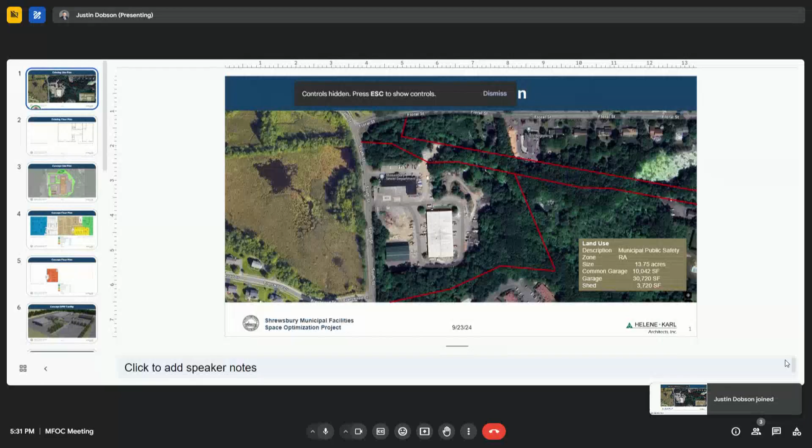Over the last, since the last meeting, there's been some dialogues about the budget and other program issues and everything that I've now reflected in the current plan. Vertex will be discussing in more detail all of the budget items. Thank you, Marc. Thank you.

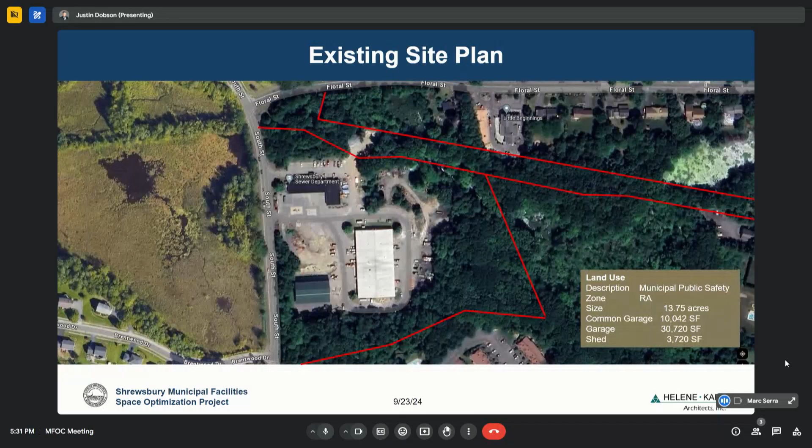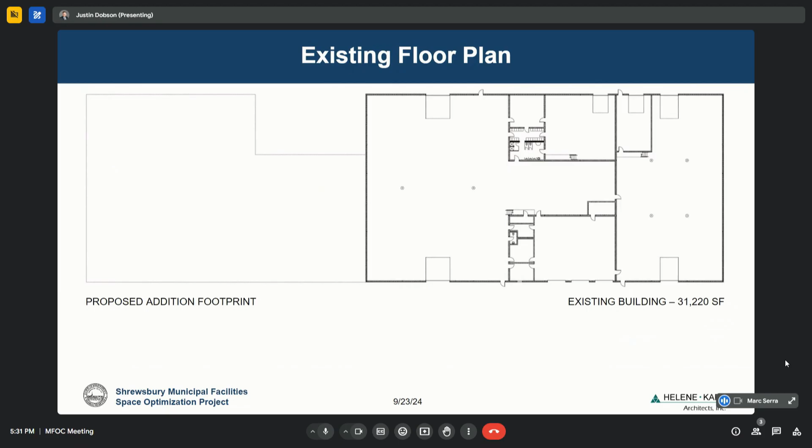A lot of these slides should look familiar. Obviously, the existing site plan, I don't need to go into that much. You're familiar with that. Next slide. Again, this is just the existing building. What you will see is a slightly different footprint, and I'll get into that in a little more detail. Next slide, please. This is the new site plan.

Based on the dialogues that we've had since the last meeting, we talked about budget and there were some concerns, so there was some value engineering done to modify and try to lower the cost. One of the big moves was to move the office function that used to be out in this little green area onto the second floor, which had a significant impact in reducing the cost of the budget.

As far as the site plan goes, it's laid out the same as before. The recycling area, public parking, parking for water and sewer, and the parking around there. That really hasn't changed much. However, there was a development of this green space by taking the addition off and putting it over the second floor between the joint. That's one of the items we can talk about further as design goes on, if there's additional desire to reduce more paving on the project.

For example, there was a suggestion that maybe we can reduce some of this green area by simply pulling this parking up about 20 feet, depending on how you want to use this area. That could add some additional green space and limit some of the paving. But those are details we can get into further once we get into the design.

The other thing you'll see, because it's a line item below the budget, is there was a vehicle canopy in the back. I'll let Vertex talk about that a little more. There was some further discussion on the recycling and some more program development. So basically we simplified that area, and it's just the pave area now. It can take all the program that was previously in there, but there will be further discussions and developments on that. Next slide, please.

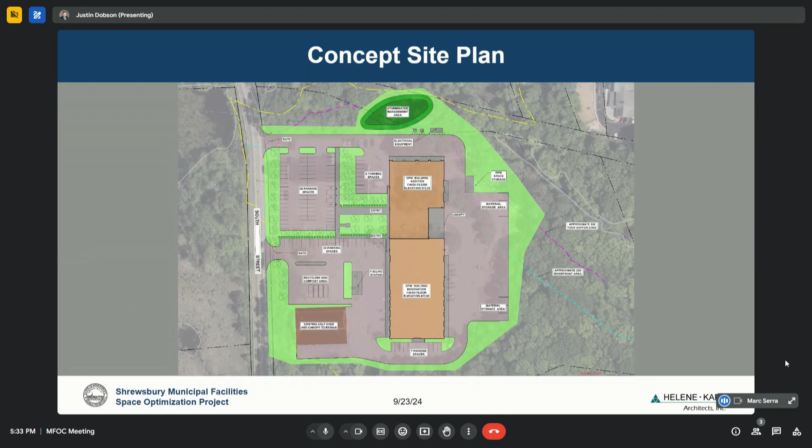The first floor plan is very similar in the blue areas, which is water and sewer. However, we took about 3,000 square feet out of that. If you remember before, the vehicle parking was very similar to the highway with a drive-through and trucks pulling to either side. In this case, to reduce some of the square footage, now that's tandem parking, which still allows flexibility to park some of the larger vehicles like the vac trucks. So that was a change to help reduce some of the cost on the overall project.

As far as this area goes, it's essentially the same, but there have been some slight changes. You may remember that the break rooms were in the back; they are now in the front, so they get better natural lighting. The restrooms and locker rooms are pretty much the same size. All the other program is essentially there except for the office function.

And we were able to introduce the bunk room, which has always been a desire, and so that would be in the back here that we can now accommodate. The trucks are still back in a covered canopy, along with the brine tanks.

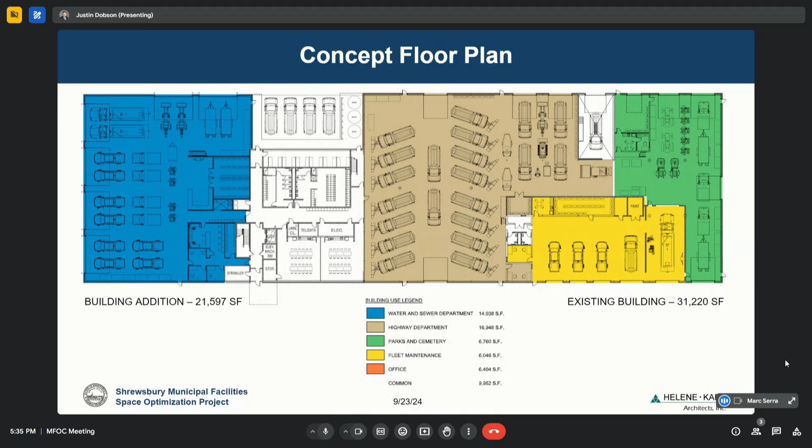This orange area is basically now the administrative area that used to be sitting in front. We've now put it on the second floor. Essentially, the biggest change is putting it on the second floor, and it's just the introduction of an elevator.

If you remember in the previous scheme, there were already two stairways there to accommodate a meeting room up there. So from a programmatic standpoint, it has not impacted anything - all the program is still in there. On the first floor, we did pick up a bunk room and probably better orientations of some of the rooms, like the break room on the first floor.

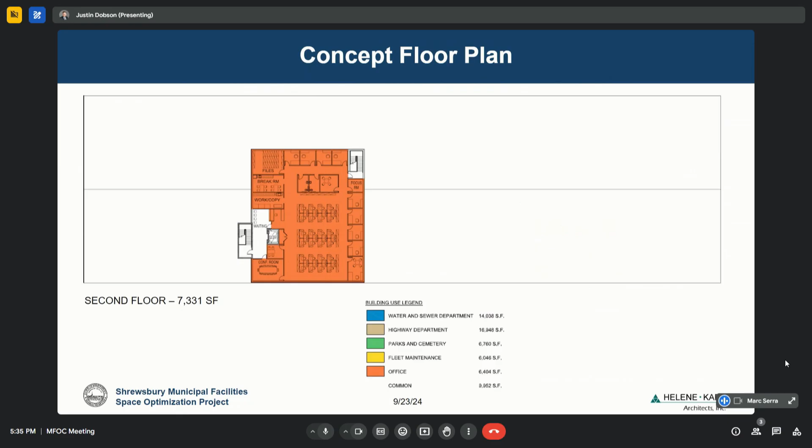So what this is going to be is I'm just going to run you very quickly through a series of images. If you would like me to stop and talk about particular areas, please do so.

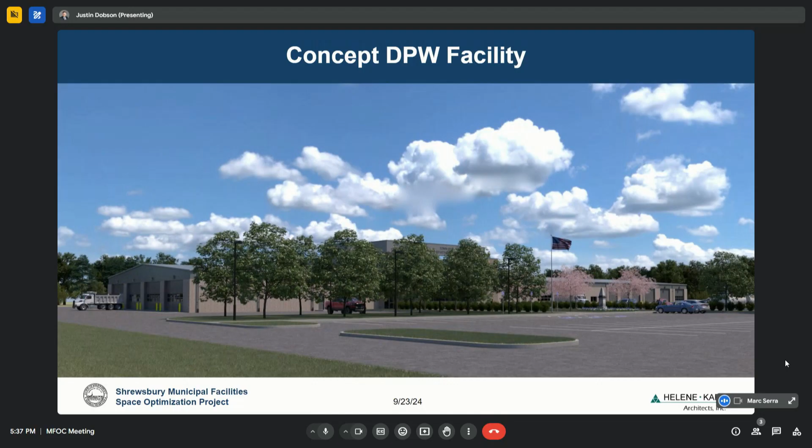This is approaching, and you see the little curb island there. That used to be the composting wall.

We're encouraging that some type of island go there while the recycling component is being further developed. That will make sure there's proper traffic guidance through that area, because if we just left it open, we feel strongly that there would be too many potential private vehicles and operational vehicles running all over. So this way, we want to make sure the path is clearly reinforced.

Again, this is just looking from the composting area. One of the other ideas that came up during the discussions was to delineate the public areas more from the operational areas, so you'll see there's an introduction of hedges there.

This can also be reinforced with like a chain link fence where the shrubs grow into it. So it's not a chain link fence per se, but it does create a nice barrier to segregate the public areas from the operational areas.

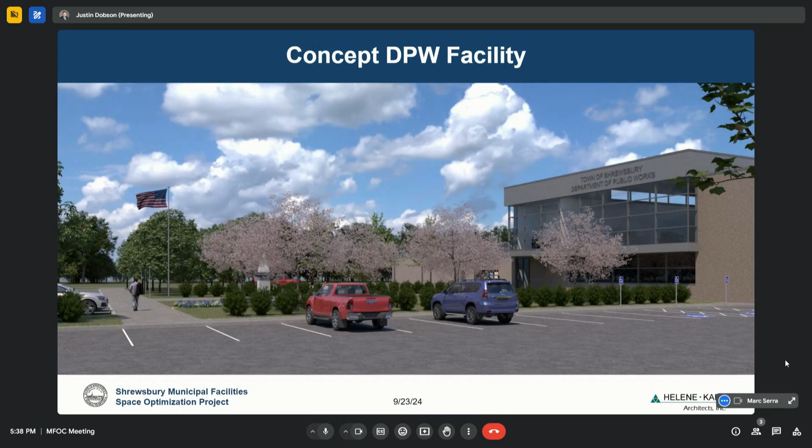This is a view from the fuel island. We have left an access road back here - I don't really want to call it an access, it's really more of a curb cut to get to the back of recycling.

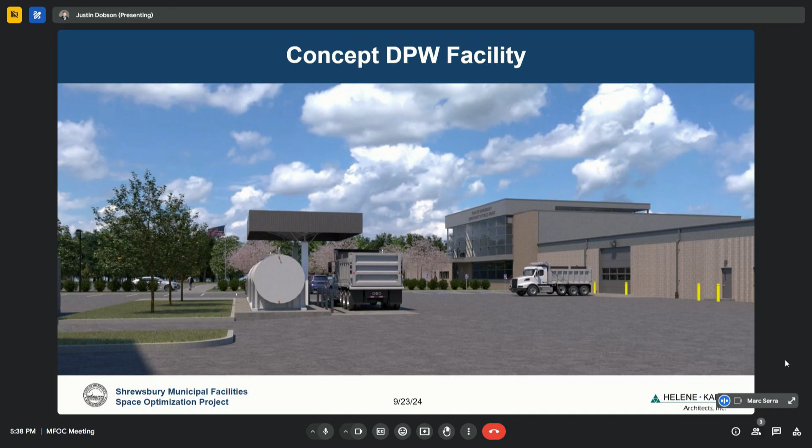We think this is an important feature because one of the discussions was talking to the highway manager and everything. He currently can sit out and look out his front window when he's in the office down there.

In this case, he would be able to come here, and if you stand at this area, he has full panoramic view of the operations for highway. And then if you go in the conference room on the other side, the same can be said for water and sewer. So if his office is up here, he simply needs to walk here and he can monitor whatever's happening in that area. And then I believe the last slide is just the finished slide showing somebody walking towards the building.

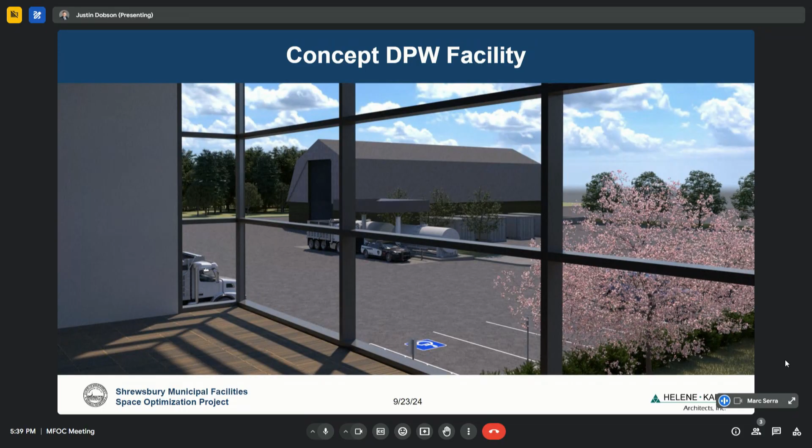Are there any questions?

I noticed you show the clerestory on three sides. Four sides? Well, you have the big windows in the front and then clerestory on the other three sides. But on one elevation, the north elevation, you don't show any window on the rendering, so you may want to look at that and make sure it's there.

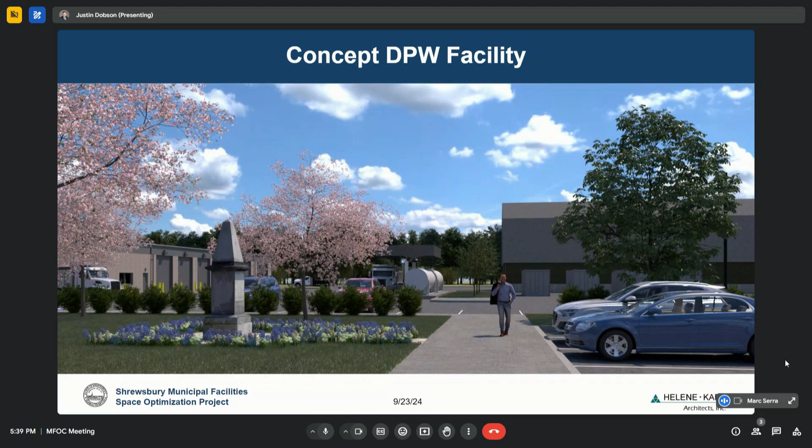The other thing too is trying to coordinate this with the heights of the roofs and stuff. Again, this is subject to change, modifications. We may be able to lower the roof a little and everything. We just want to make sure that, at least in this initial concept, the whole construction could go together, because the last thing you want is your building leaking or anything like that.

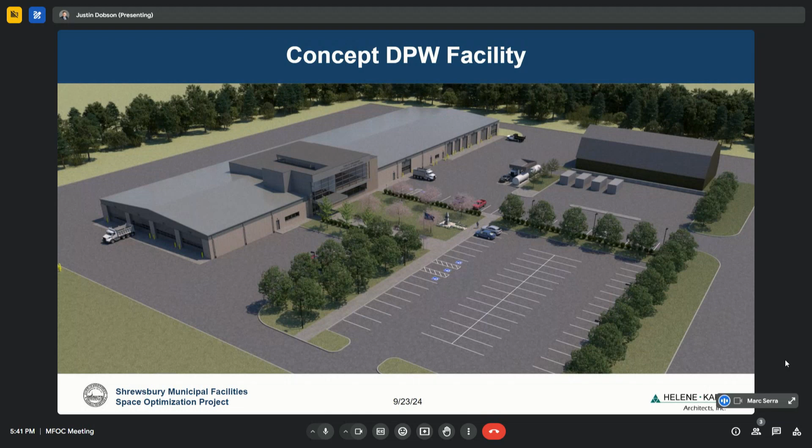Does that answer your question? Yeah, I think so, not sure. Again, we can explore this more, maybe not so much on this side, but on the other side where you do have the offices. Finalizing that final roof height and stuff, we may be able to get some additional clerestory windows in on the office. But as a concept now, we just want to have a placeholder. We feel confident with transoms above it on the interior side, full vision panels on doors, or side lights, that all the individuals in that office area will be getting adequate light and sharing, and it'll feel bright and airy in there.

The only other question is the median in the recycle area, is that just to break up the area? Okay, so the idea here is, as vehicles and cars are coming through here, if we took that median out, there's a potential that they could be driving all over. So we just want to make a clear path to say this is the recycling area. How that gets developed later on is still a work in progress, that program, so we'll develop that in the next phase of the design.